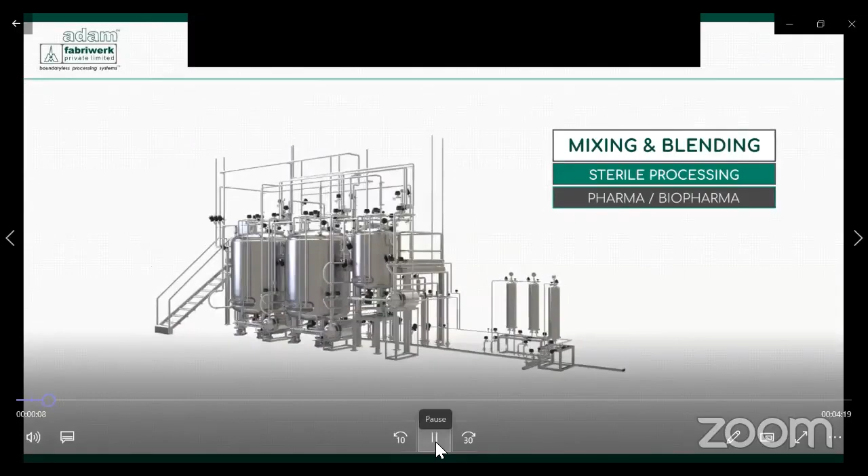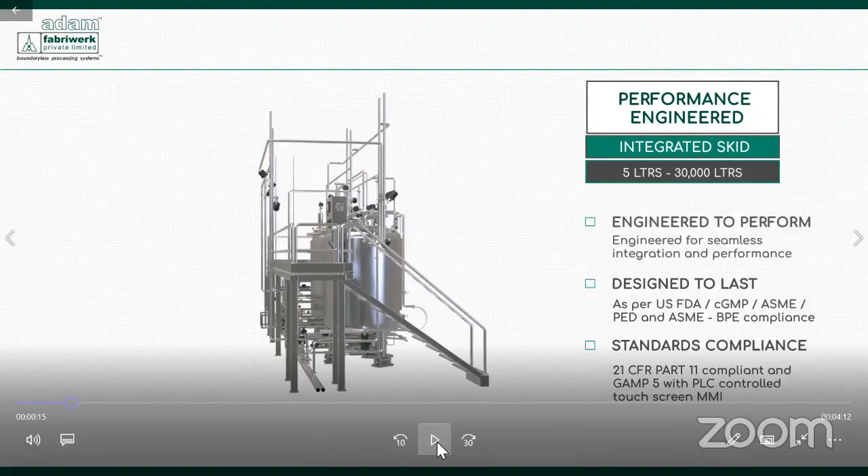I will pause as we go. The process skids are made from 5 liters to 30,000 liters. These are made to the ASME BPE standard. They are completely compliant to GAMP5 and 21 CFR Part 11 compliant systems.

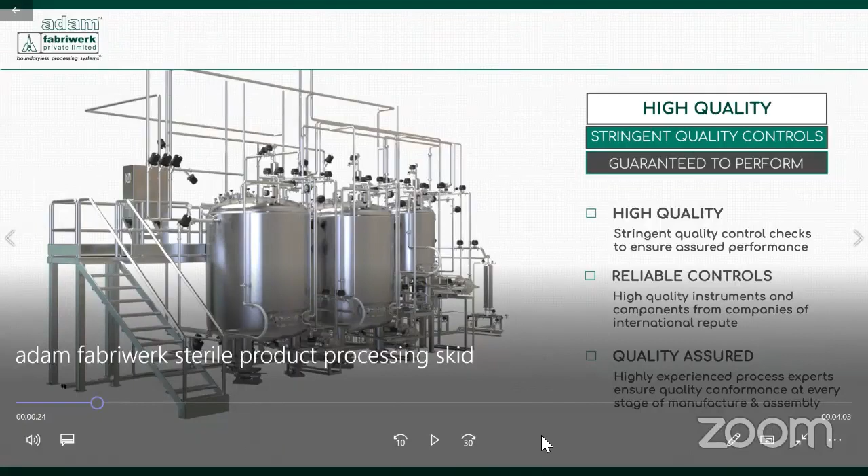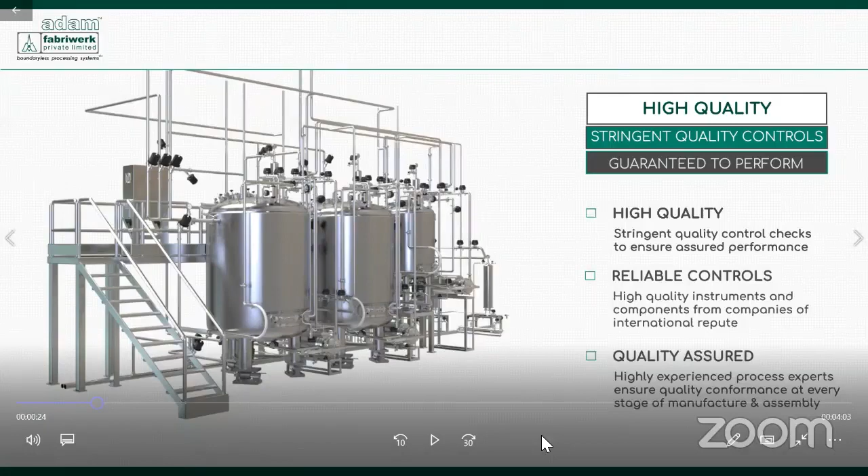The vessels you are about to see here are 5,000 liter vessels, and the vessel on the right is 1,000 liters. Now why integrated skid? Because this is assembled as a complete module and built ready to be used at the customer's site. So what do you get in this system? There is high quality, reliable controls, and assurance of specific quality levels with the instruments used.

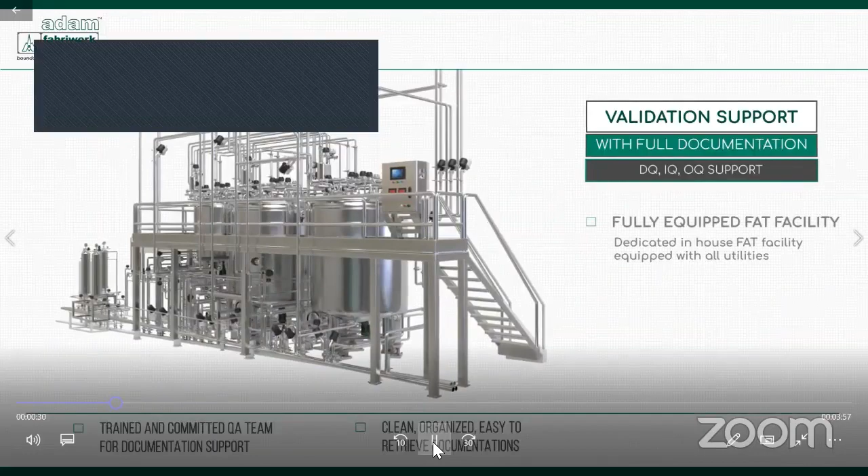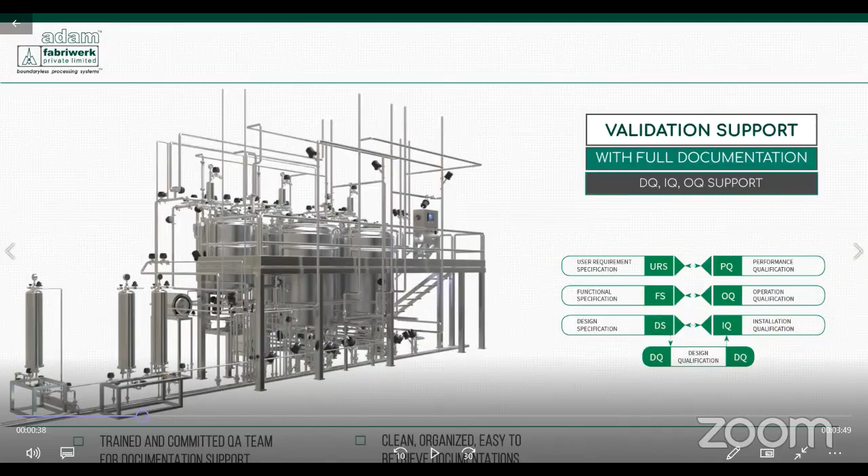From the user requirement specifications, we make it with respect to the functional specifications. The design specifications are built in, the DQ is done, the skid is manufactured, the IQ and OQ protocols are performed. So right from the functional specifications till the OQ, we have qualification documentation with complete support. There is a trained and committed QA team which achieves these functions, and there is an easy retrieval system for documentation.

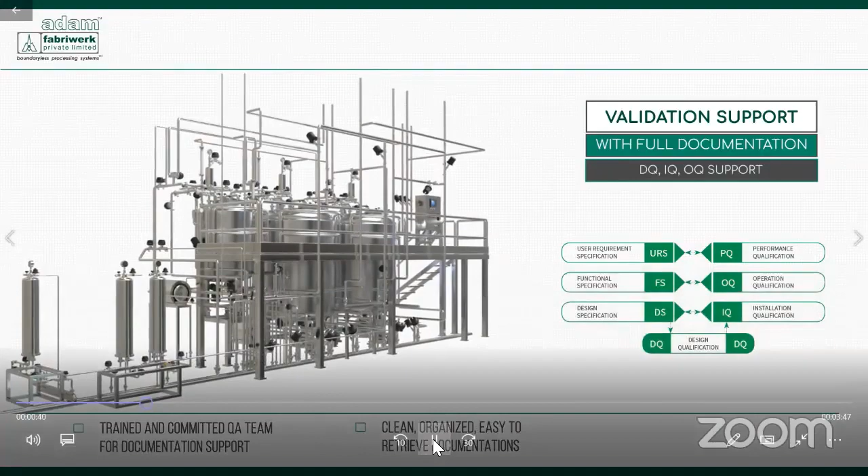The heart of today's systems is no longer the stainless steel and other instruments, but we feel the heart of the system today is automation. Because through automation, the various steps and processes of the skid are made possible, and they move together with an easy way to integrate within the system.

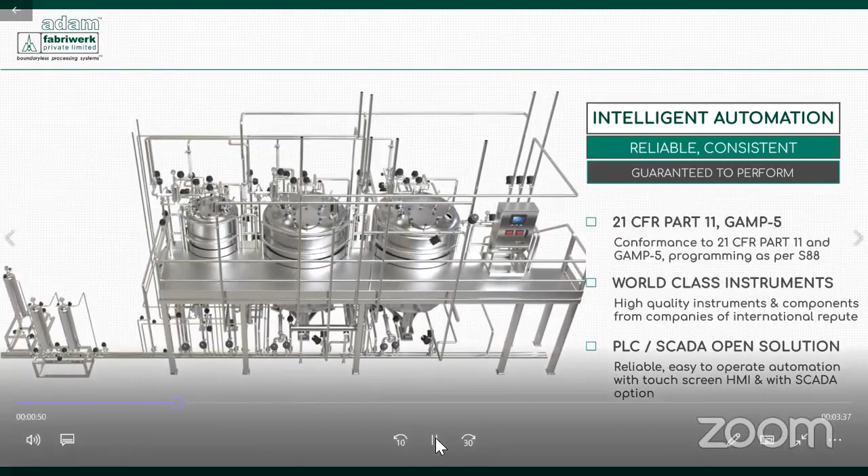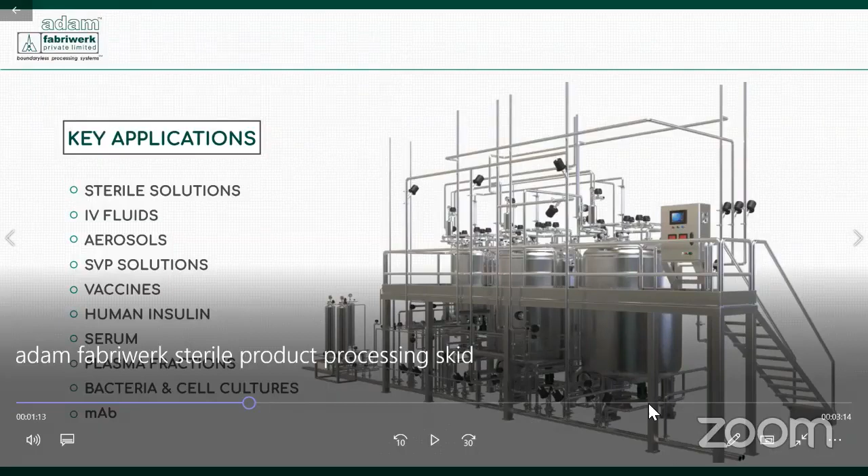With COVID-19, we have seen expanded use of these process skids and modular skids for today's new vaccine remedies, where blending is required at short notice and fast skid manufacturing has become the norm.

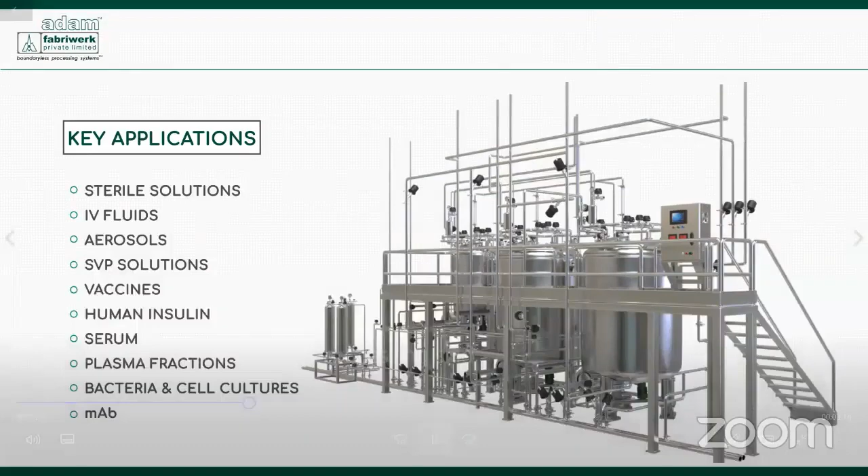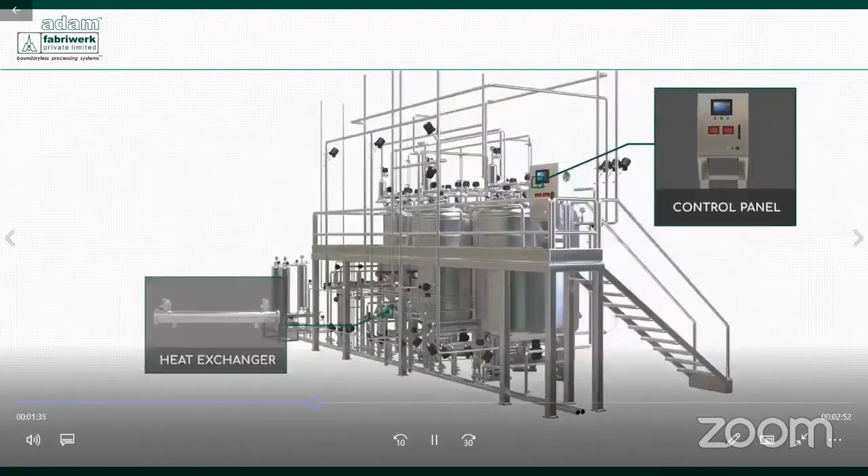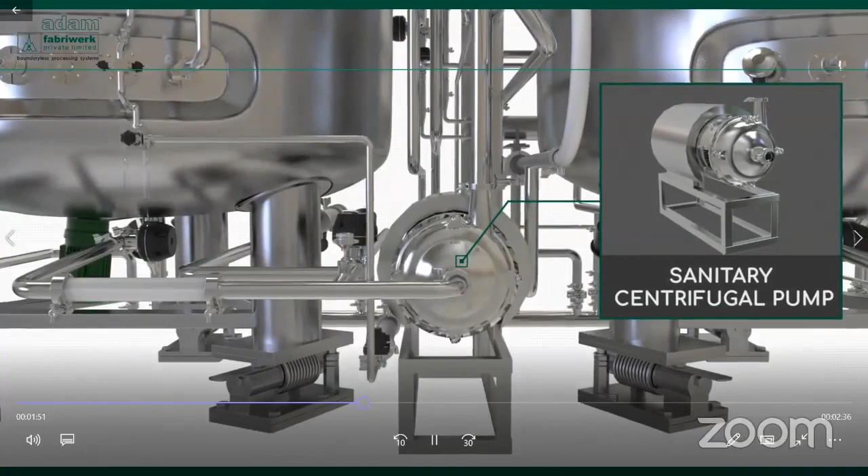There are different instruments and modules within the system, like the filters, the temperature sensor, the steam traps, the sanitary heat exchangers, the control panel, the vent filters, the load cell, and a sanitary centrifugal pump which also serves as transfer as well as for CIP.

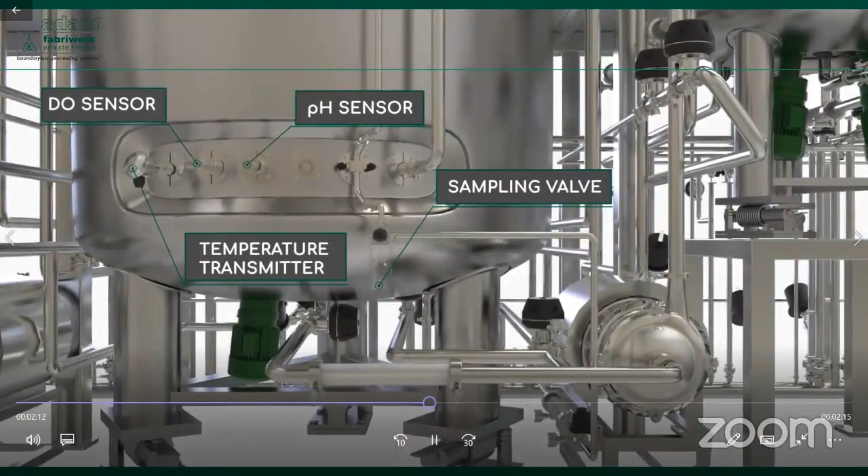Pressure relief valves within the system take care of any overpressure. Pressure transmitters inform the pressure details. Sanitary diaphragm valves within the system transfer the fluid. There are various sensors for pH, dissolved oxygen, and temperature.

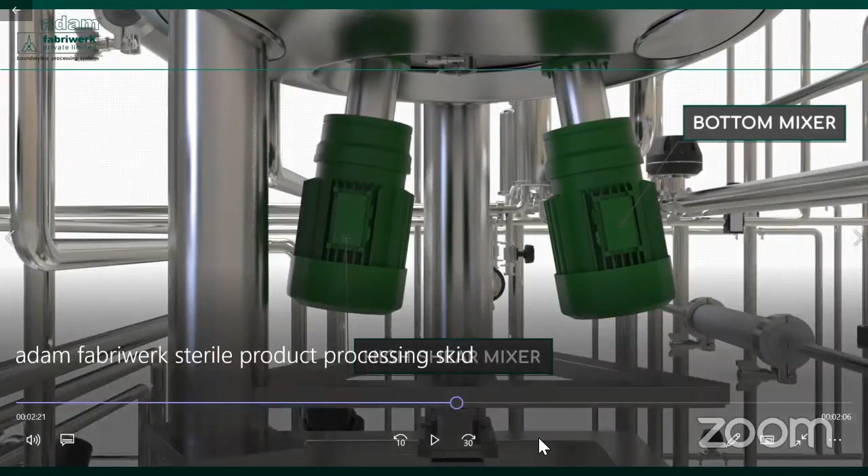There are options within the vessel for mixing. So there are blending mixers like the GMP mixers, which blend liquid to liquid products. There are also high shear mixers and upstream mixers which blend the powders into the liquids. So during compounding, the high shear or upstream mixers are used, and during filtration, the GMP mixers are used for low shear blending.

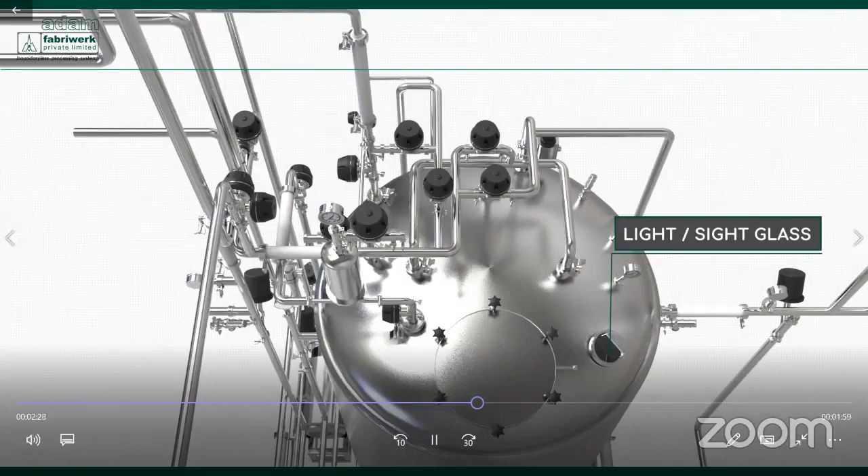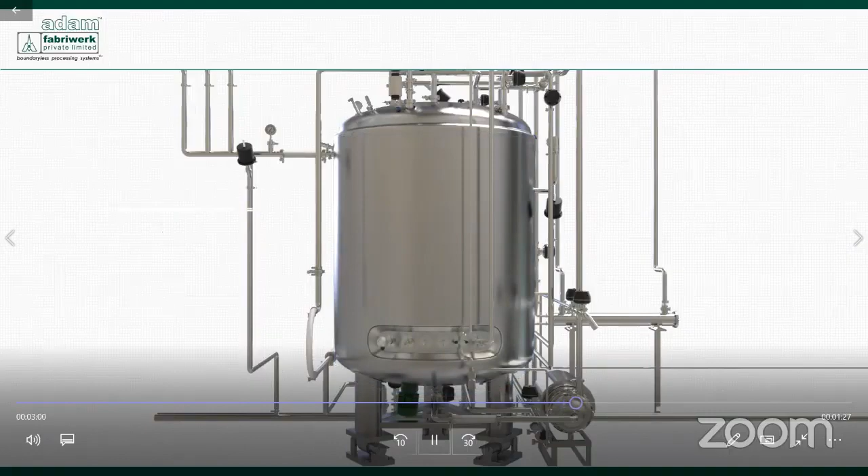We will go into the process. Typically, to start off with, the vessels are jacketed, insulated and cladded. The vessel has a dynamic spray ball within the system through which the WFI fills in and the temperature is controlled through cooling water or by steam.

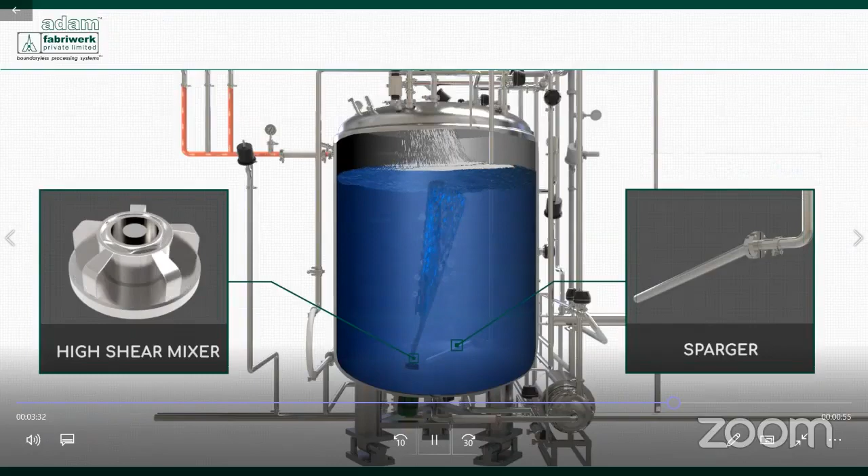These are the coils through which water can be circulated for cooling the product, to get the temperature down. 2 to 8 degrees can also be supported through this, and this is during the steaming option or heating option for heating. These are the mixers in operation with powders coming into place.

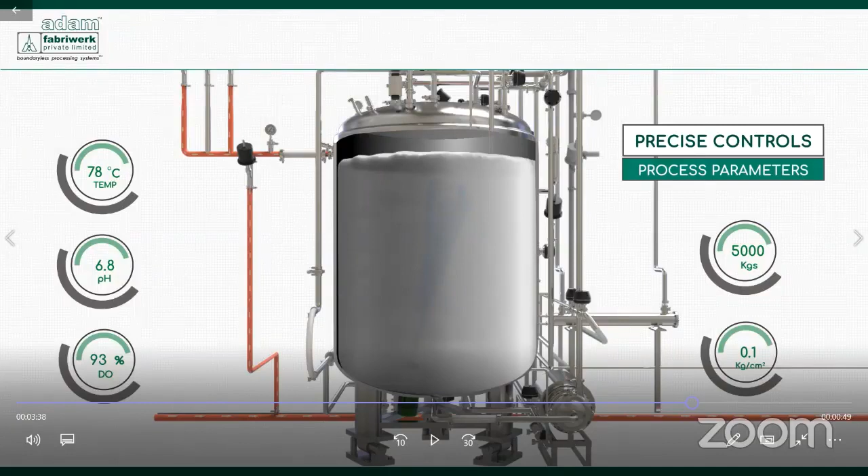The most important part of the automation system is to control the process parameters of temperature, pH, dissolved oxygen, load cell, and pressure. Now these parameters are controlled within the process vessel.

It is possible to set the recipe to desired process controls which are activated within the system through automation. So if dissolved oxygen levels have to be measured precisely, nitrogen sparging is done within the product and the dissolved oxygen levels are monitored. These are done typically for oxygen sensitive products.

The pH of the solutions is used for changing and monitoring the buffer solutions which are added. The weight of the system is monitored by addition of different drugs, APIs, slurries, and process skids part.

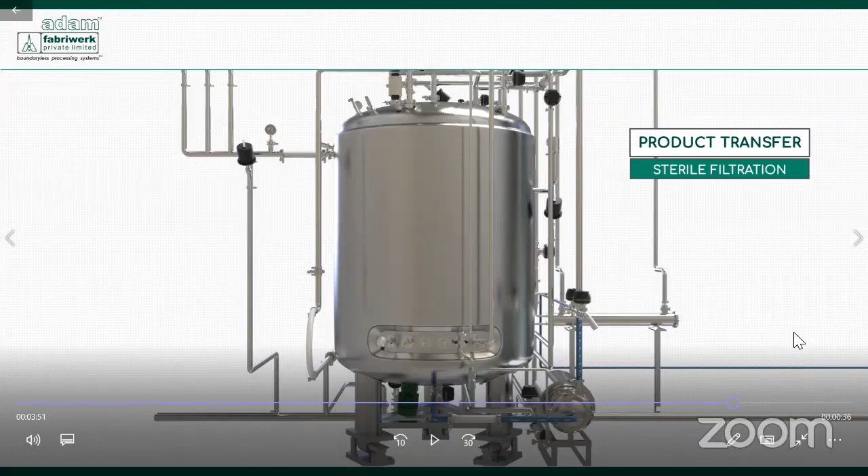The advantage within this system, what we have provided, is a centrifugal pump which also serves as recirculation for the product cycle. This not only recirculates the product through the product filtration train, but also serves as a CIP or cleaning-in-place pump during the recirculation cycle. So this pump serves two purposes.

One is to transfer the product to the filtration skid and to the filling machine. And the second is to recirculate the CIP solution and to drain the CIP solution from the process vessels. The pump can be speed controlled with a variable speed drive, and it is possible to monitor the speed and the flow rate of this pump.

Those are part of the filters. So essentially what you see is the process vessel connected with the process filters. These could be 0.45 microns, 1.2 microns, and the sterile 0.22 microns at the end. All these filters in series or in any other combination are connected through the process transfer filtration line, and it gets connected to the filling machine.

The most important part in sterile injectables today is not only the mixing and blending, but also the monitoring, precise monitoring of solutions through specific instruments of pH, dissolved oxygen, temperature, load cell, mixing parameters, etc.

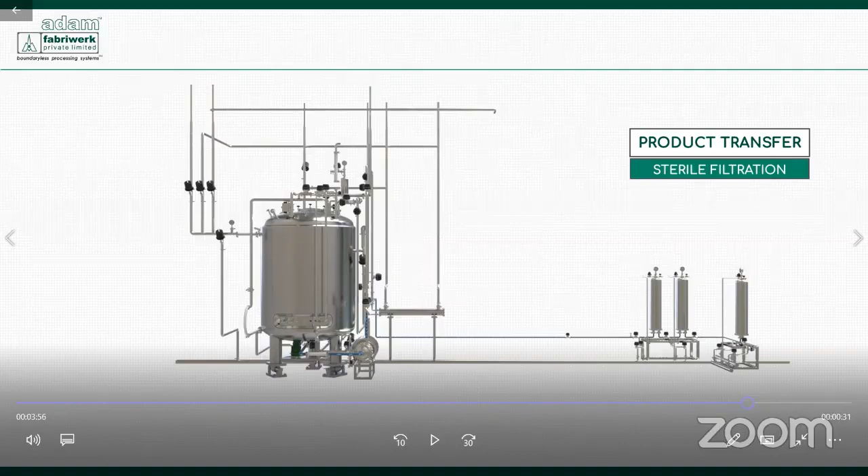It is very important that the process cycle is followed by the CIP cycle and the SIP cycle and the drain-in-place DIP cycle. This ensures the complete operation of the system for aseptic transfer and also gives way for manufacturing of complex injectable products or critical products to be done within the process skid.

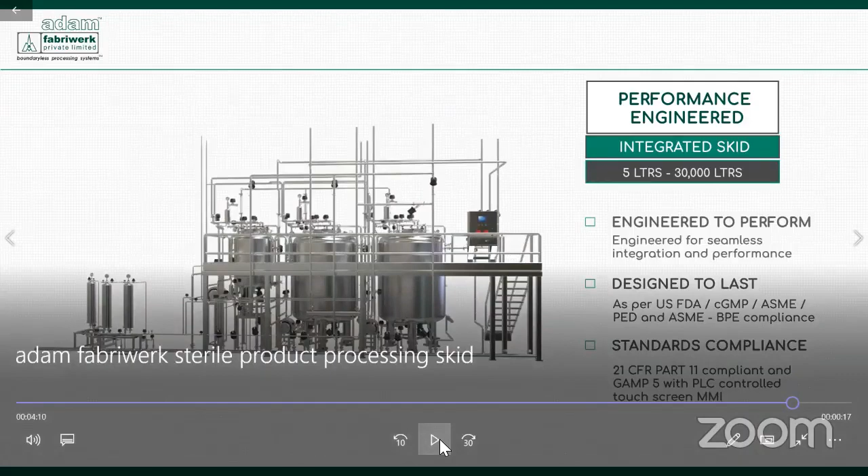The entire skid is built with automation compliant to CFR regulation or EU norms. Most of these systems today are manufactured keeping in view the local domestic markets and the regulated markets, with seamless integration and performance. Operation can be through HMI or IPC, and the SCADA or supervisory control and data acquisition controls the system for seamless connectivity to the client OPC server if required.

So the entire integrated process skid system serves as a modular manufacturing system in today's fast-paced drug manufacturing scenario, especially in terms of blending, manufacturing of new injectable products and biologics products, keeping in view the stringency and first-to-market requirements to be fulfilled.

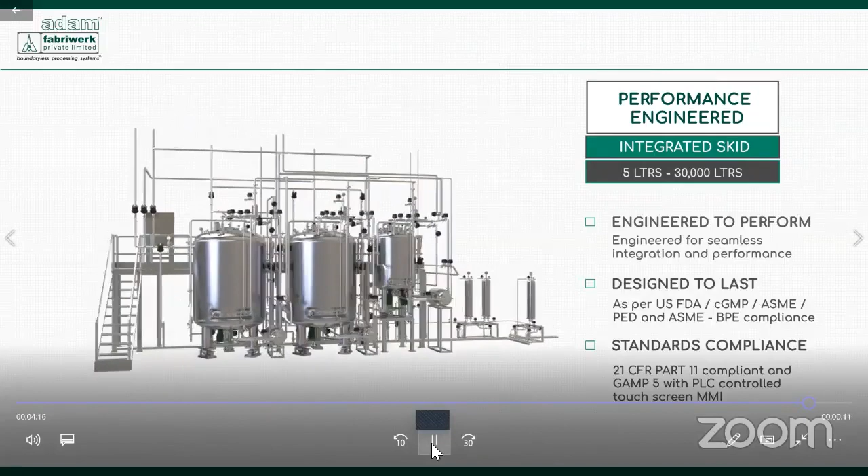Volumes are from 5 liters to 30,000 liters. So there are process opportunities to be manufactured from research and development size of 5 liters, going up to pilot scale, campaign scale, and then to production scale.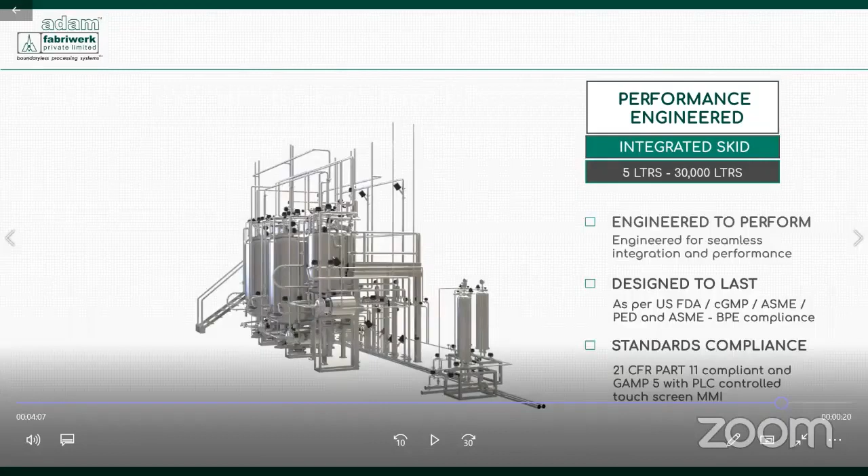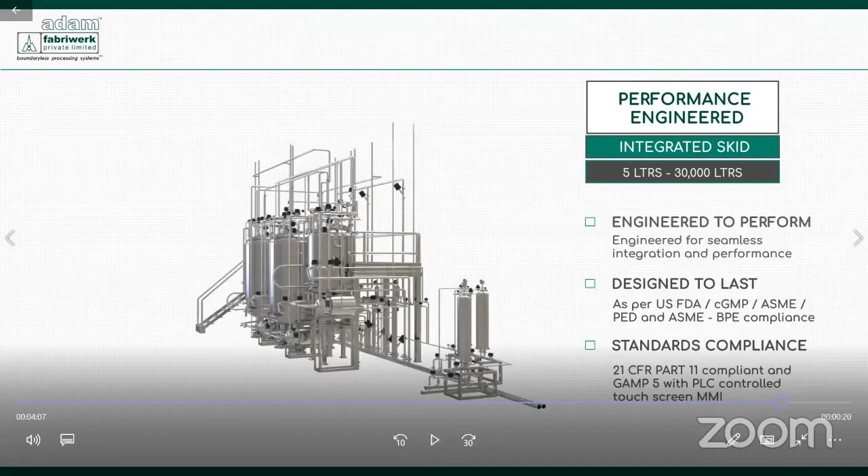Injectable manufacturing typically remains within a range on average of 1,000 liters or so. But we have started seeing larger batch sizes for process optimization, and it is also ensured that these large volumes take into account safe manufacturing of drugs and injectables on a larger scale, keeping in view the faster product requirements of reaching market for critical life-saving drugs.

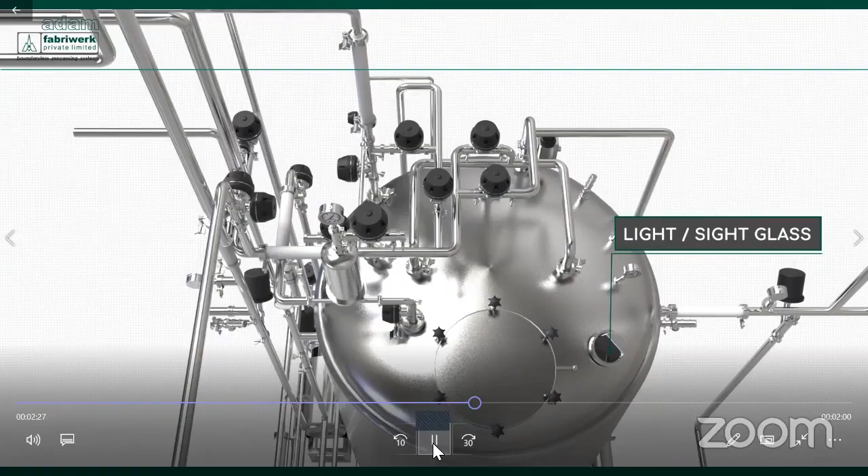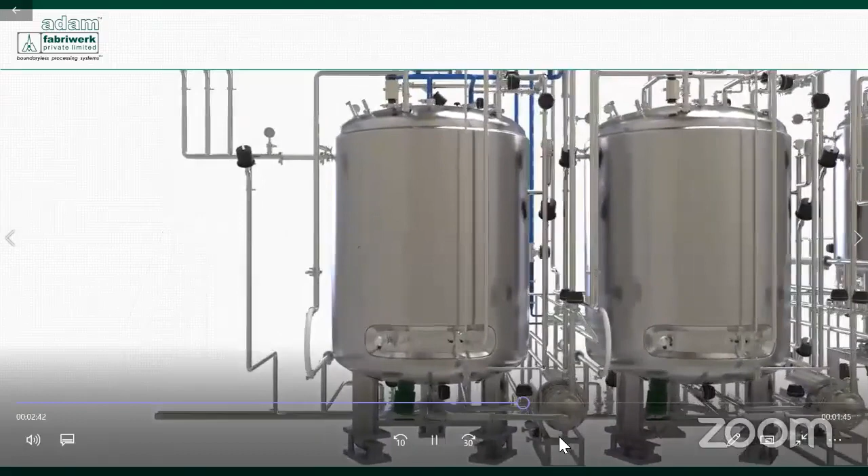There are different options within the process system which enable the use of sanitary valves as well as sanitary block valves to increase the yield of the product and also to ensure a compact size of the skid.

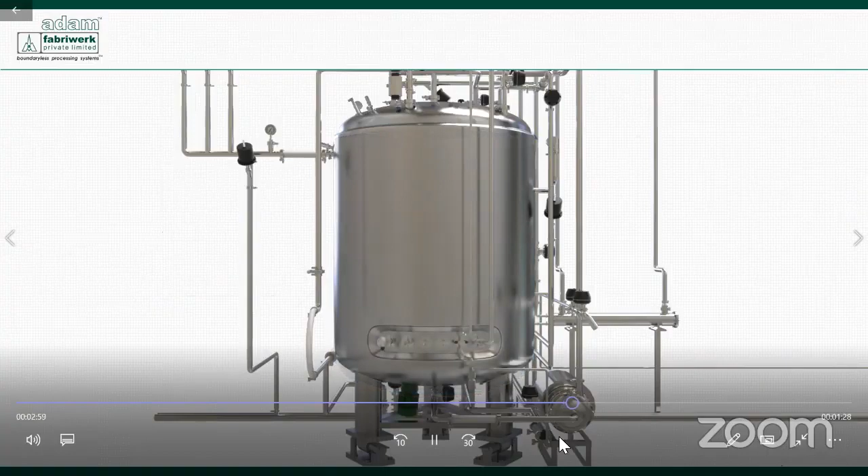The cutouts on the vessel that you see here also take care of process instruments, sampling valves, and lines for sparging nitrogen within the vessel, and it also ensures ease of access within the process parameters for the process vessel.

Options available today for level measurement are load cell and also radar.

Powders can be mixed thoroughly within the vortex created by the magnetic mixer. It also helps for faster dissolution of the APIs or any fluffy APIs, as long as the correct mixer design is used for dissolution of these powders.

The instruments can also be calibrated within the HMI, and it's very easy for the operations to be performed by the operator. The operating system is user friendly to ensure ease of operations within the system, because it is this operating system that the user is going to use for the lifetime cycle of the product system.